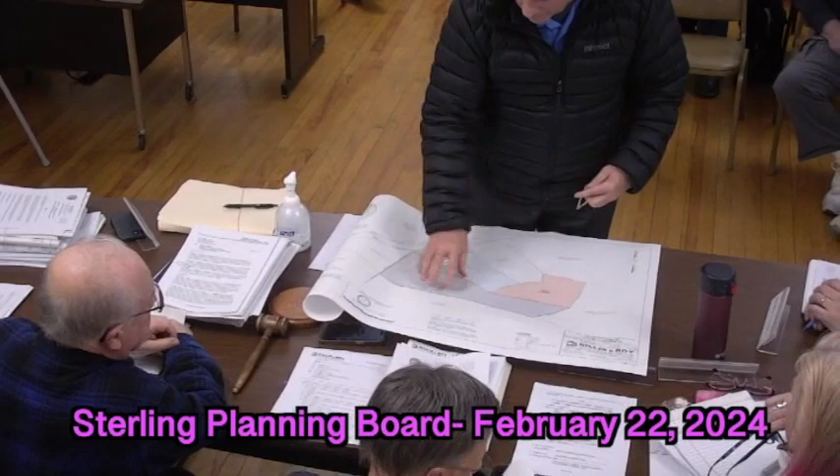I have a colored plan, which is a little bit easier to look at. So originally this was cut off by Doug Andreisek, a parcel that was over here. So what we've done is added to the gray parcel. Mr. Fideli is going to be downsizing and building a new house over here.

We created two parcels. This parcel A is going to go with the existing house which he currently lives in. And then parcel B out back, he's going to reserve that. It's a non-buildable lot to either sell to the new owners here, the existing owners here, or attach it to this parcel sometime down in the future. If these two guys don't want it, so basically that's it.

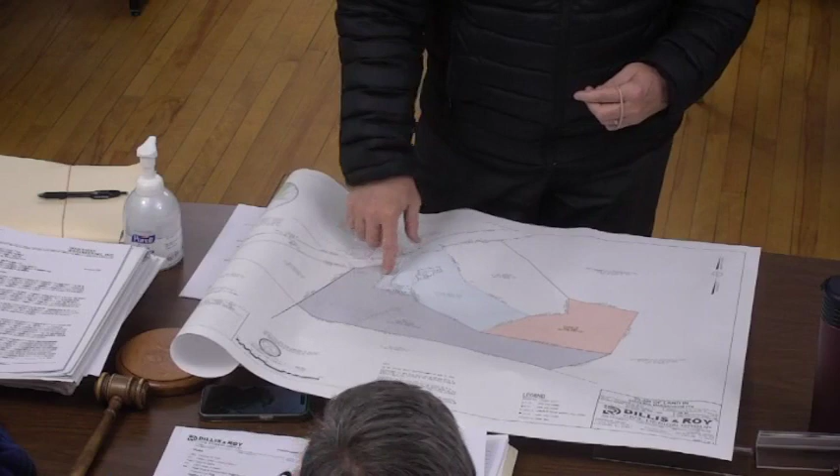So you're saying this is going to end up going with this? Yep. Why didn't they just incorporate it in right from the start? To dissolve this lot line here. Right. Yeah, so this will be the new lot line out here, which will incorporate the homemade fish pond. Okay, quarter pond. All right.

Okay, so the only thing in reviewing this that I found minor, but nevertheless, up here we'll be looking for the map and parcel number. Okay, and the owner of record. Okay, that's not on the plan already? No, that's one that we have anyways.

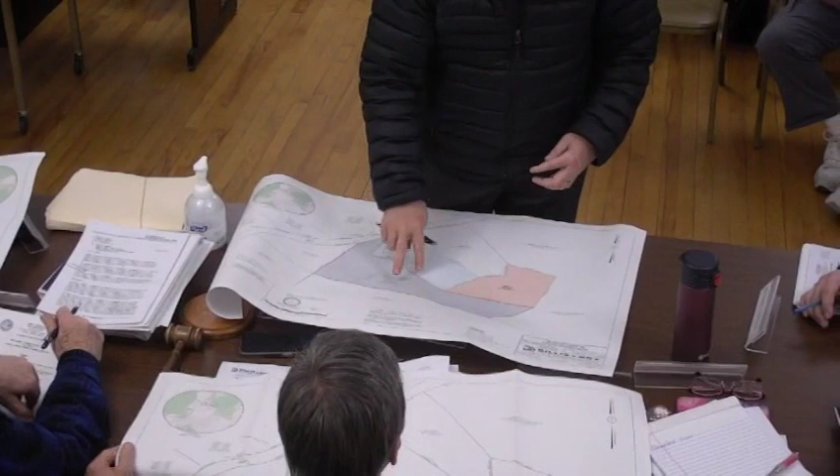Well, this is owned by the Fidelis. Both parcels are owned by the Fidelis. So that is not going to change until this changes ownership. But they own this right now. Okay, well, can you get that on there? Yep, the map and the parcel? Yep.

And then there's a typo on Sterling, Mass. We could fix that, on the bottom left. And then I don't see the box for rural residential without the setbacks. Right here it says Sterling. And then the box for rural residential showing the setback requirements.

So we can go ahead and approve it for you tonight, but you'll have to bring it, subject to corrections. Bring your Mylar in to Patty in the building department, and then she'll sign it for you. Fair enough? Sounds good. Okay.

So that being said, I'll welcome a motion that we approve the A&R plan for David Fideli, 52 South Nelson Road, with the corrections, and he'll be bringing it next week. Have a second? Second. Any other questions? All in favor? Aye. Opposed? None. Ayes have it. Thank you.

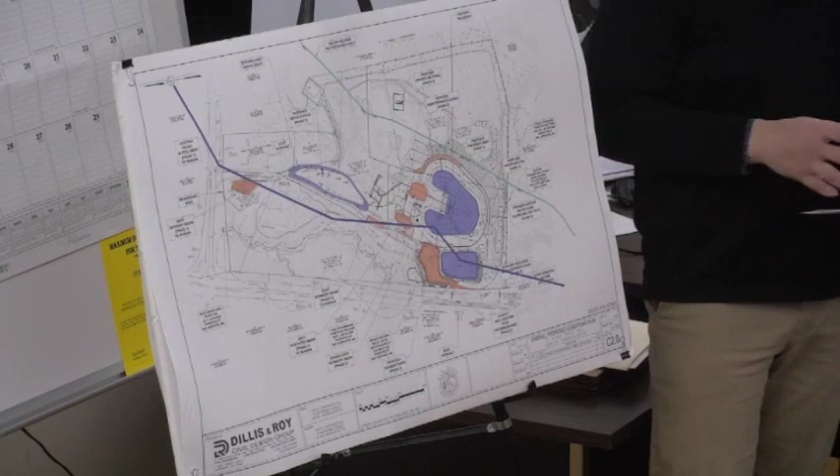So the wash plant itself is in this area. The way I'm going to walk through this is how the wash plant works, then talk about the groundwater protection district, and then some other high points from the review letter they worked out with the town of Sterling's peer review.

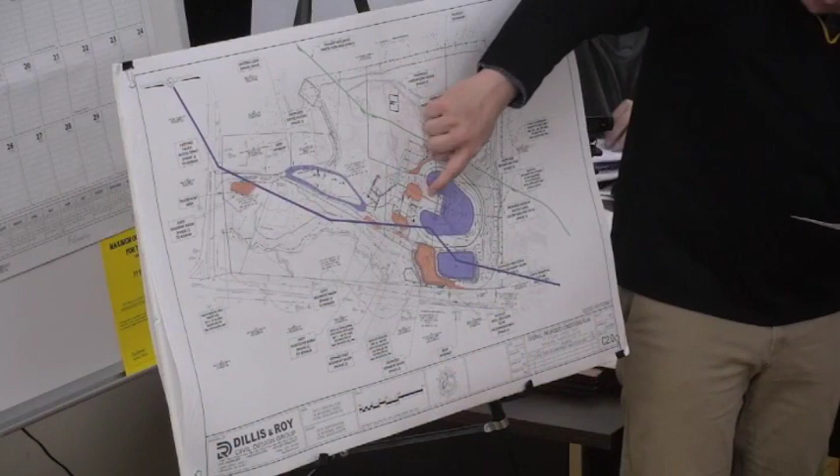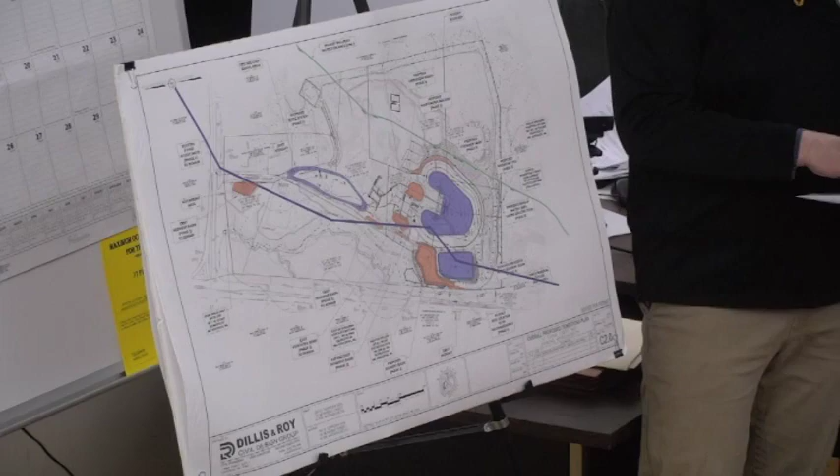The wash plant itself - crushed granite is conveyed via the existing conveyor system that's already on site and in use. It's conveyed via a new conveyor belt across the site to the wash plant. The wash plant consists of a horizontal wash screen that sorts the material to either several different conveyors or to what's called the agri-dry dewatering washers. There's a single screw one and a double screw one.

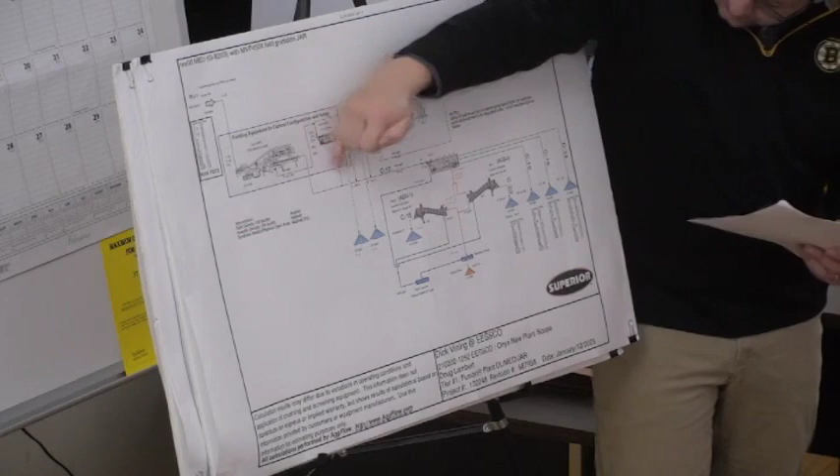Let me walk through this - these diagrams were provided to the town. Basically the existing equipment conveys the crushed material to this, essentially a giant sifter - a wash deck, just a typical screener that has a washing capability with sprinklers on it.

So this horizontal wash screen sorts the material either to two conveyors, or one of three conveyors, which sort out 3/8 inch, 1/2 inch, or 7/8 inch material, or it sifts the material into one of the two agri-dry screws, one of which will sort the material into a Title V sand, and the other is a concrete sand.

A slurry, which is a mix of water and flocculant, is pumped into this horizontal screening system from an AltaFlow pumping unit, which is located at the main maintenance building right next to it. It's kind of tall, like a silo, essentially.

The agri-dry screw units are sloped up - the material comes in the bottom, and the screws lift it up, and as that happens, water basically runs out of the material. That is collected into a series of either underground tanks, and then downstream of the tanks there's a larger processed water basin, clay lined.

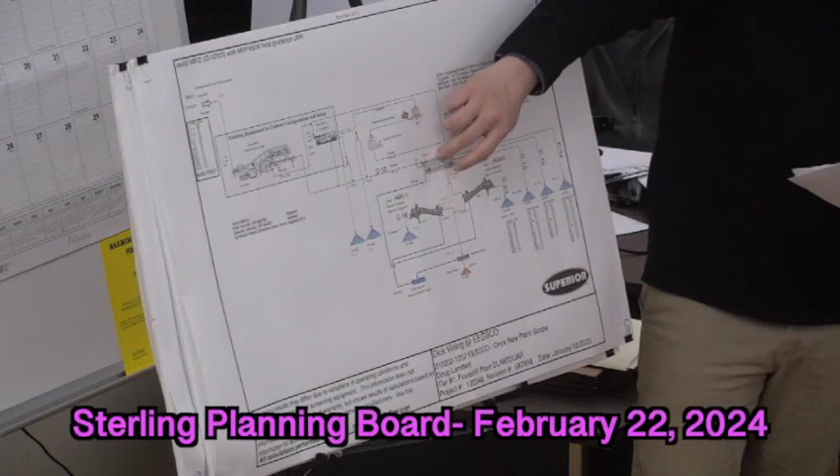These also recirculate the water back through the system, so it's almost a closed system. Based on the information provided, they need about 1,800 gallons a minute pumped into the horizontal screen. 1,667 gallons a minute of that is recirculated, so it's essentially got a 92% water reuse level.

Right there, Frank? Yes, sir. Can you show us on your plan right there, where's your thickening tank? On this plan? Not on this plan? So you're showing us right off the conveyor right now? Yes. So the thickening tank is located back at the maintenance building, and that'll have a force main that pumps to the horizontal screen.

Yep, you get it pretty close. So the water's collected and recirculated to the screen at a rate of approximately 92%. The remaining 8% would be makeup water that is drawn from the storage tanks and the processed water basin.

The flocculant used in this process is manufactured by Phoenix, brand name EA3117. This product is of standard use in water treatment processes. The MSDS sheet has no recommended restrictions on use. The substance contains no components considered persistent or bioaccumulative and toxic, and the material is not classified as dangerous for the environment. It's completely miscible in water, meaning once it's in the water, until the water evaporates away, it stays in it, which is why we have the clay-lined basin.

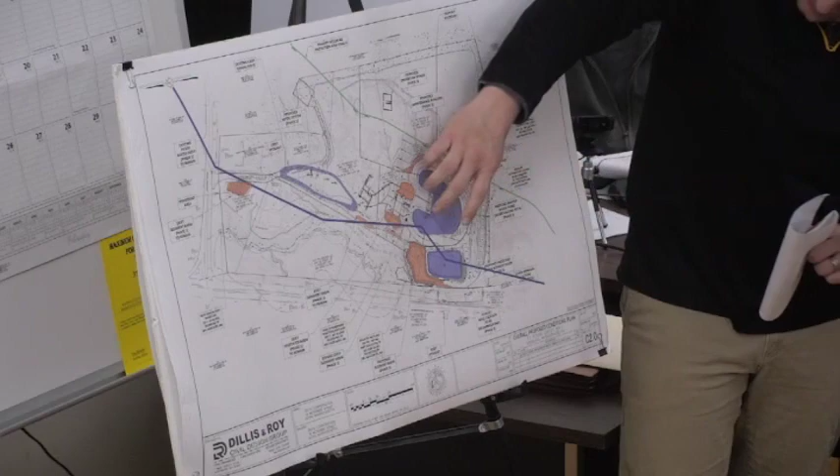So what this overall proposed condition sheet shows in two colors here is this big purple area, which is the wash plant and stockpiles. This purple rectangular shape is the processed water basin. All the water that falls on the wash plant and stockpile area will be collected by a series of catch basins directed to the underground storage tanks. The underground storage tanks have an overflow that discharges to the processed water basin, which is clay lined. The processed water basin, above the clay liner, has an underdrain that is piped back to the tanks. So it's essentially a closed system.

The processed water basin itself is sized so that if we have a 100-year storm event of 8.28 inches over a 24-hour period, which is the Northeast Regional Climate Center extreme precipitation amount, up to and including the 100-year storm event that falls on this area, this basin can contain it and not overtop.

On top of that, if there was a situation where it was overtopped, our system has a 100 horsepower pump that's going to eject the water with a float system automatically up and out of the protection zone to the upper part of the floor of the quarry. If you want to show them where that is, I believe it would be up to this area, discharging there to de-water it if we're in an event and nobody's on staff, and for some reason there was a 12-inch event. We have that provision as well, so the area doesn't flood.

Back-to-back storms and like that, so the area won't flood out either.

I didn't read it, what's the capacity of those underflows? So the tanks are three 50,000 gallon tanks, so there's 150,000 gallons. And then the basin at the 100-year water storage elevation is about 800,000 gallons. So there's basically 950,000 gallons of storage. Now, they anticipate using 70,000 gallons a day of water, so we have an order of magnitude more storage than the process needs.

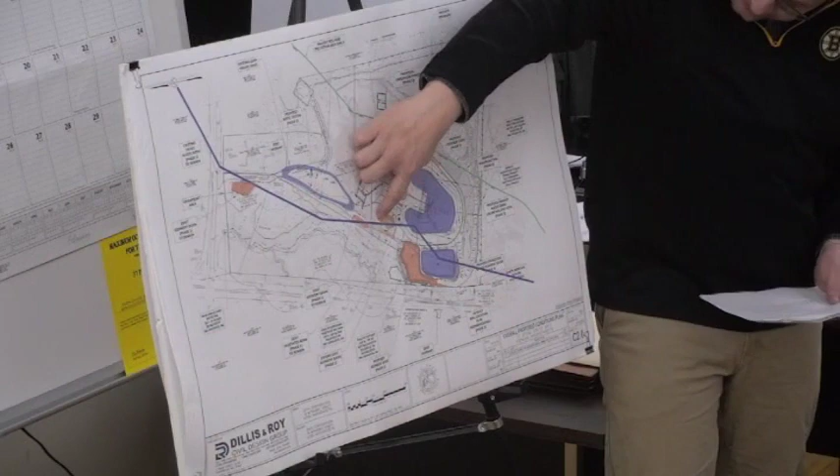The orange that you see, this area, both sides of the wash plant, along the edge of the property line and up here, is stormwater. This basin is a stormwater recharge basin. It handles essentially all of the rest of the site.

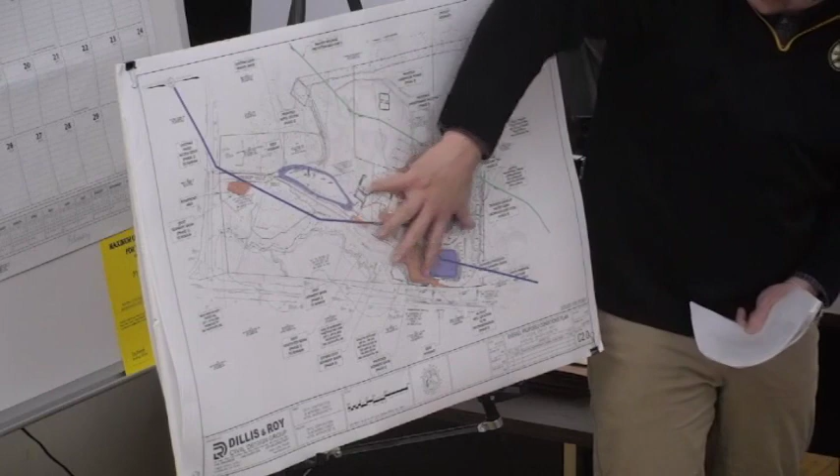We modeled the stormwater dynamically, which means all of these sediment basins in this area, excluding this basin because it's hydrologically disconnected, are dynamically modeled so that as they fill up, they can cross flow back and forth. There are pipes connecting them, sized to contain the 100-year stormwater event. In a 100-year stormwater event, no stormwater from the developed part of the site leaves the site. It all gets to this basin and is recharged.

Something around in my notes, unfortunately for myself. So as far as, are there any other questions about process at this time? No, I think it leads us to the questions which were addressed in this letter here that we got the other day. I wonder if you could read this for us.

Yes, so there's been concerns on a portion of this clipping into the Sterling groundwater area. If you could just read that, I think it addresses it, if you have the same one I have.

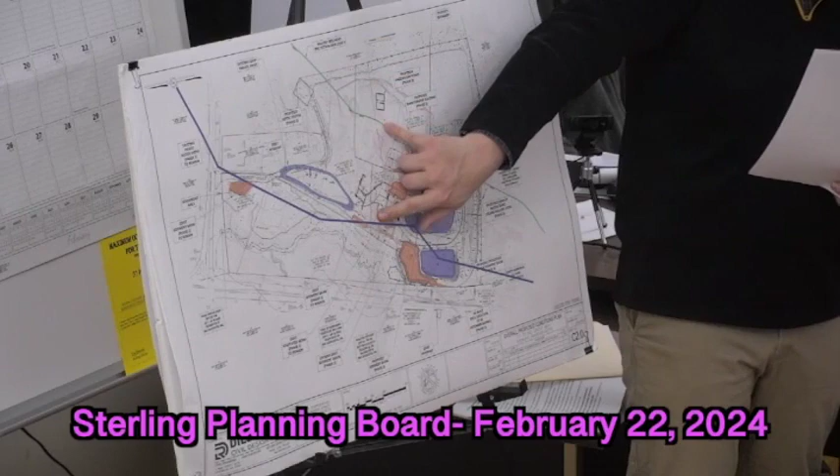So right now we're showing both. That location of that line is somewhat irrelevant with our design. We still have the clay line basin, we still have the tanks, and our processed water is kept 100% separate from any stormwater that could actually become a discharge.

Section 301-4.672B requires the plan state the proposed uses. The wash plant, processed water basin, and associated improvements were labeled on the plans. Section

301-4672C states that the planning board must be satisfied that the project has been designed to eliminate any significant threat of contamination to the groundwater. In making such a determination, the planning board shall give consideration to the simplicity, reliability, and feasibility of the control measures proposed, and the degree of threat to water quality which would result if the control measures fail.

Any modifications, deletions, or additions to the plans required by the planning board for the purposes of ensuring protection of the groundwater must be made prior to the issuance of any building permit or certificates of use and occupancy.

The applicant, in consultation with the planning board and peer reviewer, has proposed to fully capture all processed water in underground storage tanks and an at-grade clay-lined processed water basin. This processed water basin has been sized to contain the entire 100-year runoff volume from the wash plant area and the processed water basin. The water in the underground storage tanks and clay-lined process basin will be reused in the wash plant process and will not be discharged to the ground within the water protection district.

That is wide enough for an excavator to drive around it, so it will be able to reach the basin without driving into it. I'll flip the board when I don't need it anymore, however.

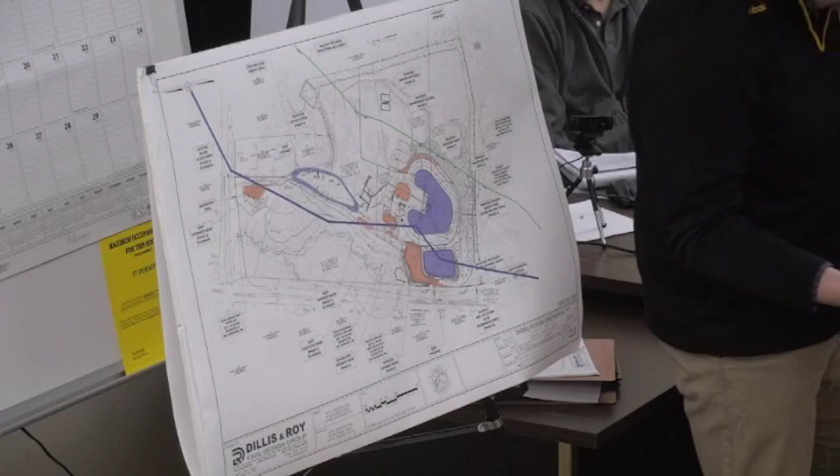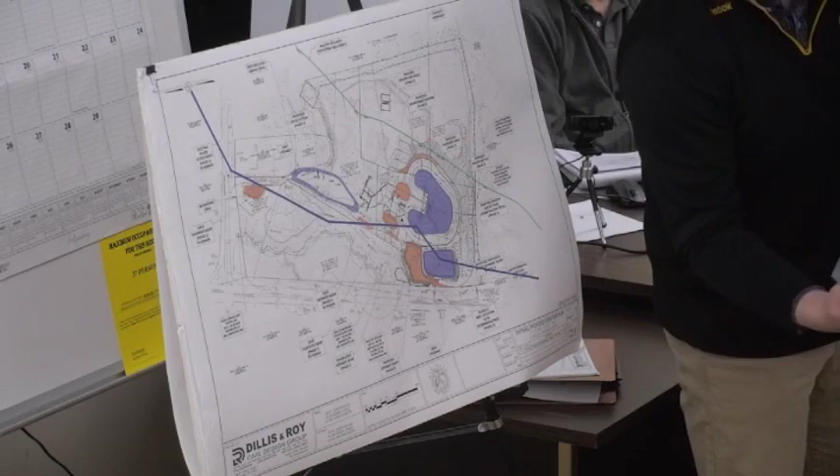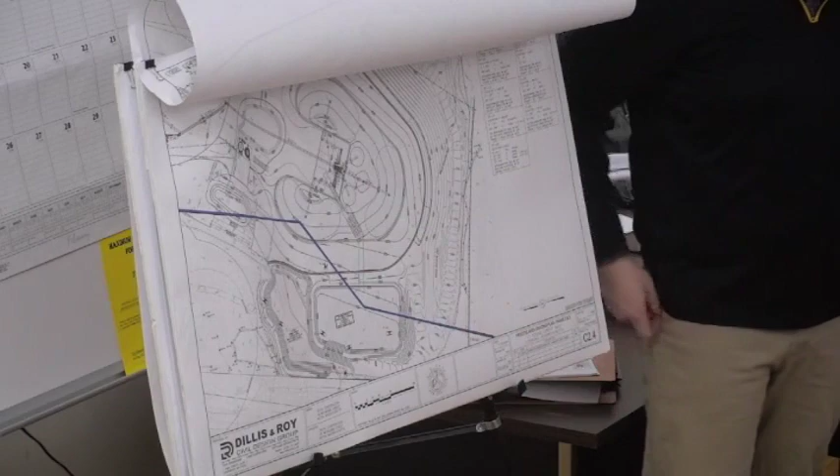I was going to pull up the grading plan just to show the berm around the basin that provides full access, so Onyx's maintenance activities will not require them to drive into the basin with tracked materials. We provided a berm around the basin, an access way that will allow them full access into the basin without having to drive into the basin. To add to that, it's a clay lined basin with a grid of pipe in the vicinity of $50,000 to $80,000 worth of pipe in this area, with sand above the pipe.

So what we would be doing is scraping down till we get to clean sand and then top dressing with new sand. Our intention is never to get through the piping, have to replace our own system, or get into the clay liner, so the clay liner should really never be impacted. Just want to add some layman's terms as far as what you're concerned about, but you'll hurt yourself to do that. It'll be very expensive if we mess that up.

There's approximately 6 to 15 inches of sand borrow material at the invert of the basin above the clay liner, so they would have to dig out a significant amount of material that's supposed to be there before getting to the liner itself. The only driving reason to clean it would be if we're not infiltrating quick enough to serve our own purpose, and we would want to skim that off and just replace the top.

It really shouldn't be like the normal thought of a sediment basin where it's getting constant sediment. We have a lot of provisions in place to make sure it doesn't happen, because if we're using dirty water to wash our stone, it's inevitably a bad practice. So we're fighting the tide for no reason.

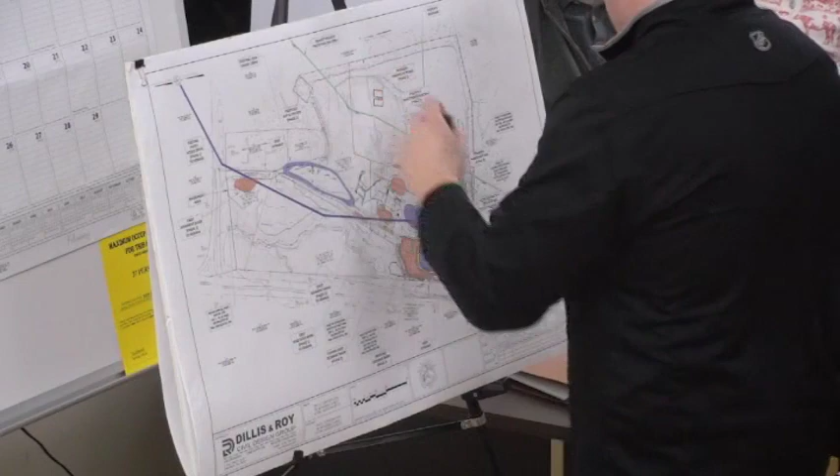Two of them, yes. And if we need 3 or we need 5, there's certainly plenty of space as they're running their operation and they figure out what works best. They can put 2, 3, 4 more up there.

And the intention is, once it does dry - there's 2 basins, one you pump into for a week, the next one you pump into the next week, you alternate basins - during that we would pull the dry material from there, put it into a stockpile because now it's dry, and we'd haul it off-site. It's going to be sold as bedding material for electric lines and piping, it's fine bedding material. It's not there forever, it's not like they're backfilling on site with it - it's another saleable material. Yeah, it's not waste, it won't be waste. Correct, it's not waste.

Okay, thanks for that clarification. Anybody else? I have one question, it has nothing to do with this plan.

I've gotten numerous phone calls, including myself as a taxpayer, of blasting coming down out of your place, and it's shaking my house, which is probably about 3 miles away. What's the damage gonna be down the road?

You can seismograph, do whatever you want, but I don't think the fire department is over checking every time they blast there. They have to be there by law, every single time.

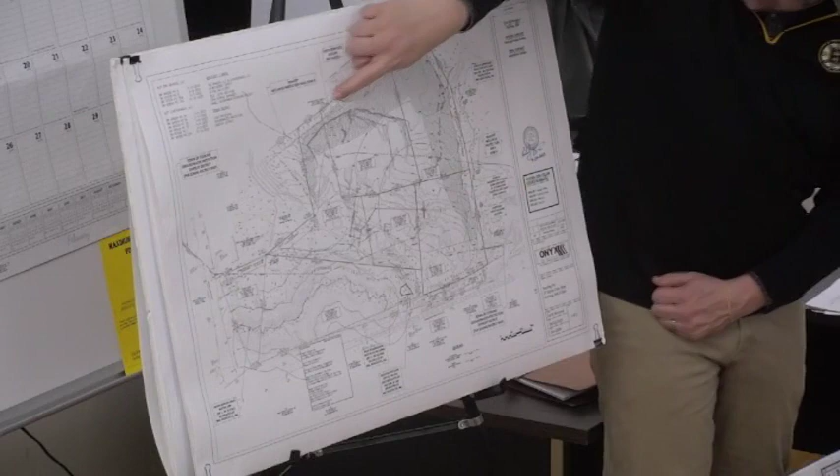Right, Steve, if I may. 10% grade, yeah. So there will be a buffer maintained around the site at basically level, and then coming down at, I think it's a 3-on-1 slope? Yes, a 3-on-1 slope, which is mowable. When I'm talking about side slopes at these boards, I like to say that a 3-on-1 slope is what you can comfortably drive a lawnmower on. Steeper than that, you feel like you're gonna fall. At 3-on-1, you feel pretty safe.

Coming down, there'll be, like John said, 10% continuously graded, topsoil, loam and seeded. And just to continue the water flow where it's been going, so we don't have water tributaries that are changing. The purpose of this is that the water will go where it's been going forever. Right? We'll need to speak to that, please.

So worst case scenario, how the site is left when they're done, is a big grassed area with some hills, some slopes. And or the economy changes and we come back to you guys with part of another project, I don't know, but at this time it's way off in the distance. But that would be another application and more review and more chance for input. Understood.

Frank, I have a couple more questions for you. Yes, I'd like to add the groundwater line. When I look at the plan, where the septic system's located, there's no protection for anybody parking on top of the system or parking on top of the tank. So we'd be looking to provide some kind of bollards or something unless you have a rated tank. It's rated for H20. Is it rated? Yes, H20 rated tank, and I believe the tight tank? No, it was just rated to park on, will not be a tight tank.

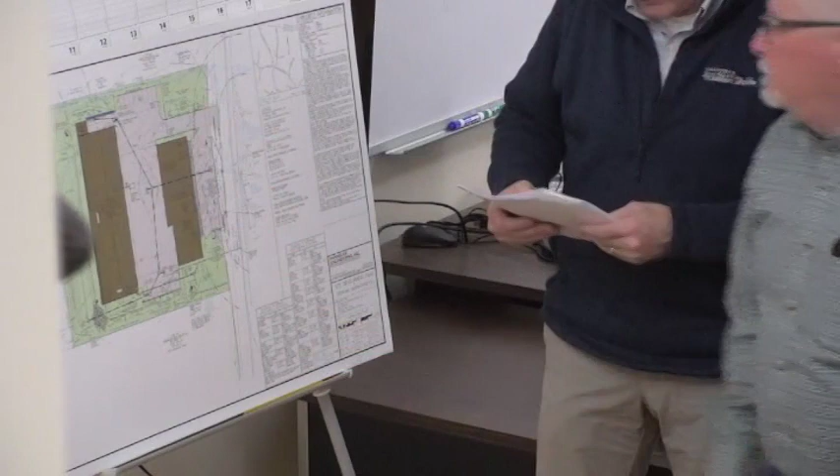So we also have provisions for snow storage and landscaping shown on the plan. Obviously, snow storage along the windrows and different areas around the property. We have some landscaping that's been added in this area here, and I believe there's been some other ones, to the other side of the driveway.

The site lighting, we're looking at using just wall pack units off the building. It shouldn't need a lot of lighting because it's really just the vehicular traffic in this area here. There may be some walking back and forth, but that's really the limit of where it would be, and then some security lighting around the building. All those fixtures will be night sky compliant with refractors, so they can be adjusted should any overshadow issues come up. We don't anticipate any pole lighting being required for the project.

Anything else, Sean? Just let me know, Bill. So that's essentially the site plan aspect of things, and then we can get into the special permit stuff.

So with respect to the site plan, we did receive comments from Graves. We did get those, and I actually have those that we've reviewed, and I emailed them to Steve earlier tonight, late, I get it. And so we can go through those if you'd like, because I have response in there, it's all relatively quick. I think it would be best if we waited until the next meeting for that, because that's when we'll be making decisions, otherwise you're gonna end up doing it all over again. That's fine, so I'll hand it to Steve and he can do his distribution.

Thank you. Okay. So with respect to the special permit, the items that we need to talk about relative to that is the items relative to the granting authority and what they can grant and what they need to look at. So the first one is social economic community needs, which are served by the proposed project.

The requested reduction in parking is expected to aid social, economic, and community needs of the town of Sterling. By allowing this reduction in parking, the applicant will be allowed to expand the existing space at the location and provide additional employment opportunities in the area. Additionally, the new business will improve the economic needs of the town by providing additional tax revenue generated by the business and the new building construction.